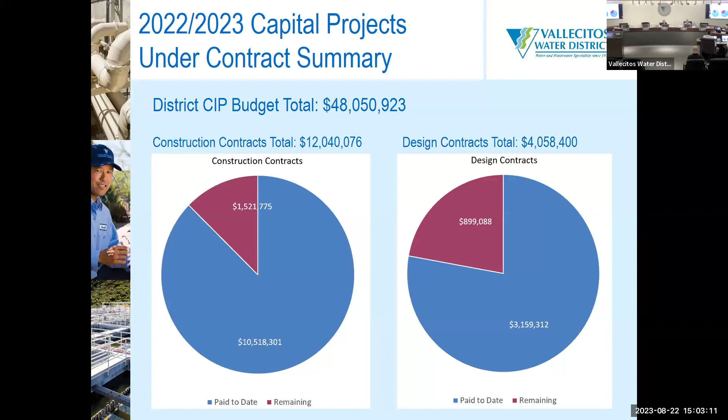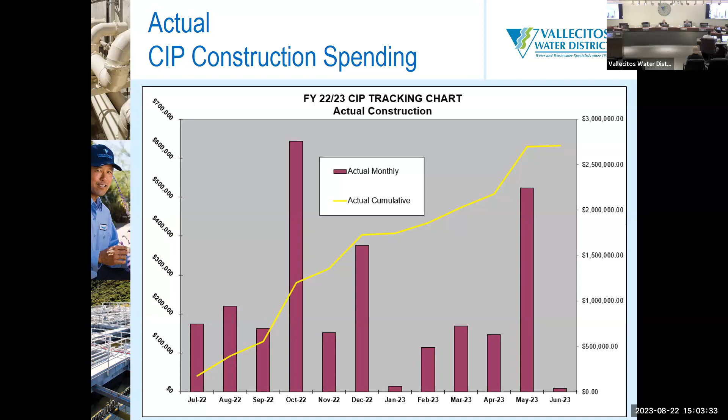Of that CIP construction spending, the actual dollars spent over the year fluctuated throughout the year in different months, as you see by the bar graph. But for the cumulative total, we spent roughly $2.7 million of actual construction dollars over the year.

The completed projects realized in 22-23 were 4 projects, including the retaining wall at Meadowlark that is providing space for the Tesla battery pack, MRF tertiary structural rehab and repairs, which was a coating and lining job at Meadowlark, Sage Canyon tank refurbishment, a full exterior and interior refurbishment of the steel tank at Sage Canyon, and the 2021 sewer lining and rehab program. In total, the contracts were just over $3 million.

Looking at the change order percentages, which we always track for all of our projects, on average between the 4 projects we realized a negative 12.7% change order, which is a bit skewed because on the Meadowlark tertiary structural rehab and repairs project, we ended up removing a large part of that scope, which resulted in a credit to us.

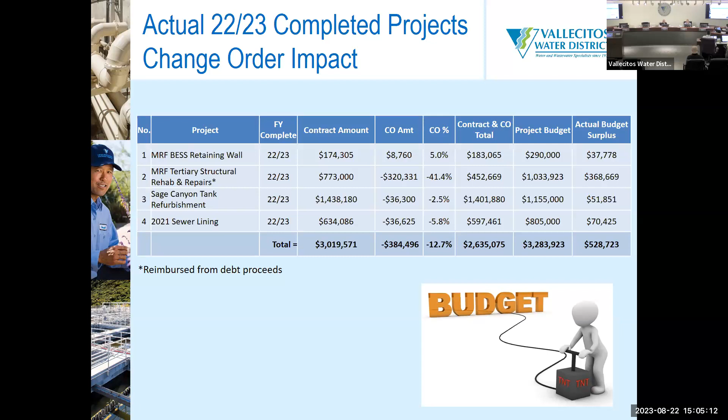Typically we average between 2 to 5% change order values on any given CIP, and that's about what we saw here, notwithstanding the tertiary structural rehab and repair. That value skewed us off a little bit. Looking at a longer 10-year horizon, we tally up the averages of change orders over that period.

Over a 10-year period, we executed 176 change orders on all of our CIP projects, averaging out in total to $826,000 in change orders, which equates to 1.7% of contract value over that 10-year period of time.

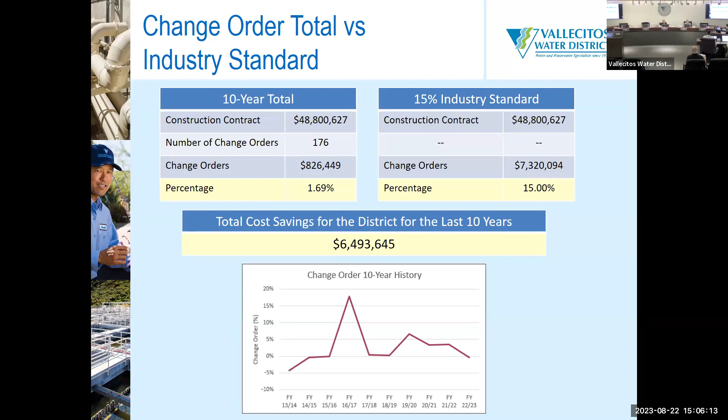If you do a direct correlation with an assumed industry standard change order average on CIP projects at other agencies, roughly 15%, that would escalate the change order value to over $7 million on that same construction contract value. So in total, taking the delta between the two, we've saved the district roughly $6.5 million over 10 years under these assumptions.

For design engineering, we opened 4 new contracts awarded in 22-23: the meters testing and maintenance building, Coronado Hills tank interior and exterior refurbishment, which got combined with Richland 1 tank exterior refurbishment for just over $10,000 total, and the Rock Springs valve replacement for just over $16,000 total. New contracts totaled $213,000.

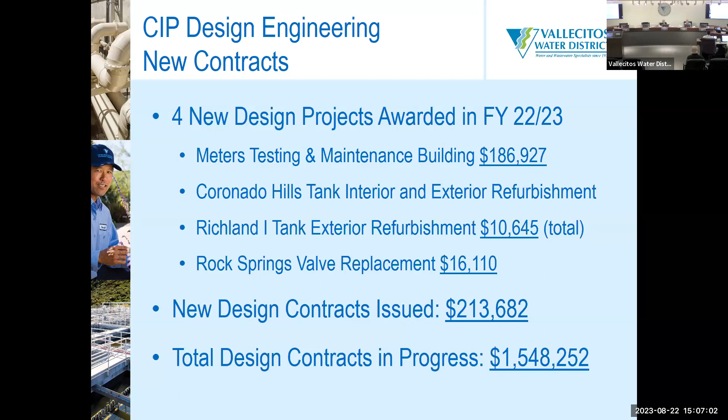Total design contracts in progress, carried over from prior years, were still doing over $1.5 million. So while it looks like it was kind of a slow year in design, we had a lot of carryover projects which kept us busy.

The active CIP projects, including those carryovers, are listed in this table: Tres Amigos replacement phase 1, the Meadowlark conversion to sodium hypochlorite, the chlorine contact tank expansion project at Meadowlark, Las Posas 10-inch water main replacement, Rock Springs valve, Wulff waterline improvements, and meters testing and maintenance building, as I mentioned in the past slide.

We've paid to date roughly $970,000, which equates to about 63% of these total contracts value.

Question: are we doing any of these designs in-house? That's a good question. We had a large role in-house design of the Rock Springs valve replacement, although we did end up getting a consultant on board to help us with design services related to planned production, like drafting services and that type of thing. The staff is really carrying the ball.

As you can see, the contract amount on that is only $16,000, so it's not a huge amount. It's largely just talking about planned production, which we don't really have the capabilities to do here on that scale.

So we are running some other projects in-house. The 2021 sewer lining and rehab was completely performed in-house, and that project was finalized in construction last year. That project isn't on this list because we're just talking about design right here. We also have the Ranchero Sewer project, another smaller one, which we'll carry forward in-house this current fiscal year as well.

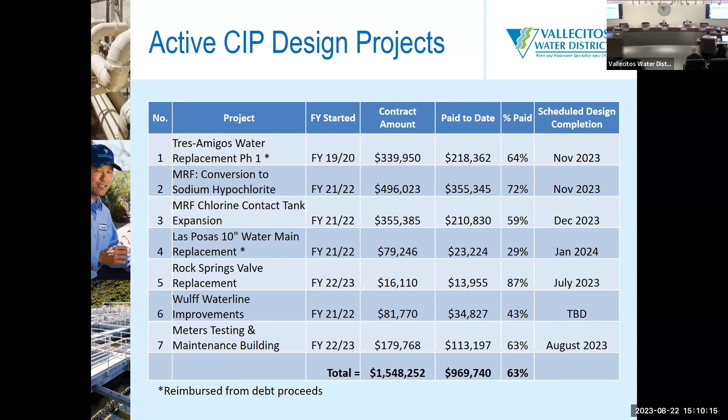And then we go by 2 different phases. If it gets over 150, we're going out for RFP. And if it's significantly larger, whether it's a $250,000 or $350,000 design effort, then we cast the net a little wider. Okay, thanks, good questions.

Just another look at historic spending for CIP, going all the way back to fiscal year 2012-13. I'd like to note that since my time here starting in 2019, we've been ramping up capital facilities and design spending, and this tracks really well with where we're at today in construction awards, getting some large milestone operational priority projects out to construction, which started back in the 2019, 2020, 2021 timeframe.

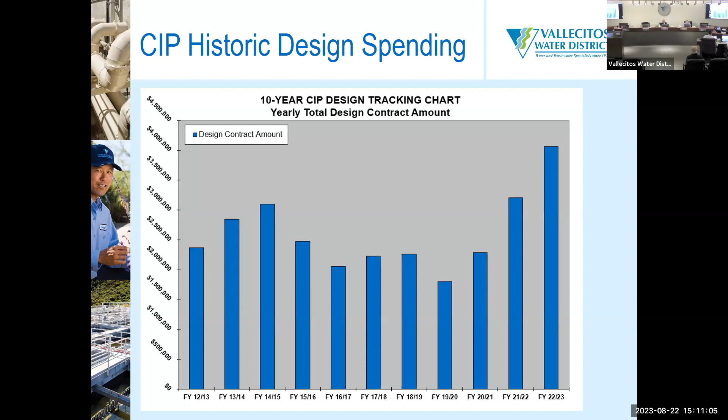Those are actually finally getting realized now in construction. Projects in construction over the last fiscal year 22-23.

As I mentioned, the in-house design 2021 sewer lining and rehab was completed in March. Meadowlark tertiary structural rehab and repairs was just recently completed in June, just before the start of the current fiscal year. Palos Vista motor starters upgrade — I have good news, this one is now breathing new life. We expect to complete this one after a bit of a delay.

We expect to complete this in September, next month. Sage Canyon tank refurbishment was another large priority project, and we experienced some delays during the pandemic, but completed that earlier this fiscal year in February — last fiscal year, I'm sorry. And the Meadowlark retaining wall for the Tesla batteries was completed in March.

And the 16-inch emergency bypass, along with a 12-inch fail-safe pipeline rehab and repairs, a big priority operational project, is currently in progress. We're nearing completion and expect that will be attained in October of this year. All in total, just under $5 million of completed projects in the last fiscal year.

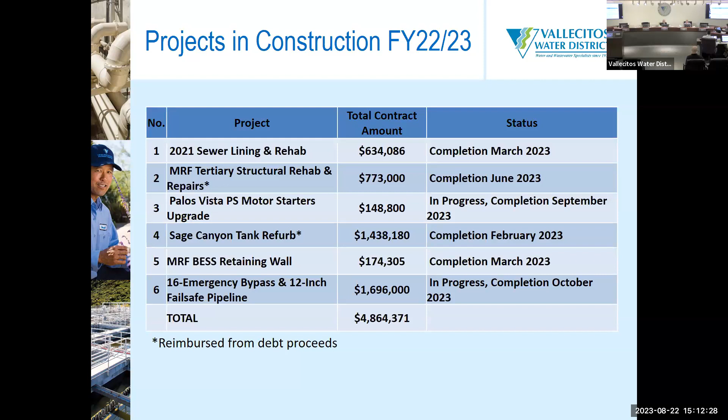And just some historical annual budget versus actual CIP spending, and how we utilize those funds each year. In the last fiscal year 22-23, I had a total CIP capital facilities budget of nearly $30 million. We realized actual spending of $19.5 million, which equated to about 66% utilization of that budget. And in that 5-year average leading up to last fiscal year, including last fiscal year, we averaged about just under $25 million.

$24.3 million in annual budget, and we realized spending of, on average, about $14 million, about 58% utilization. So last year, we actually increased our average utilization by about 8%. So something that's noteworthy there.

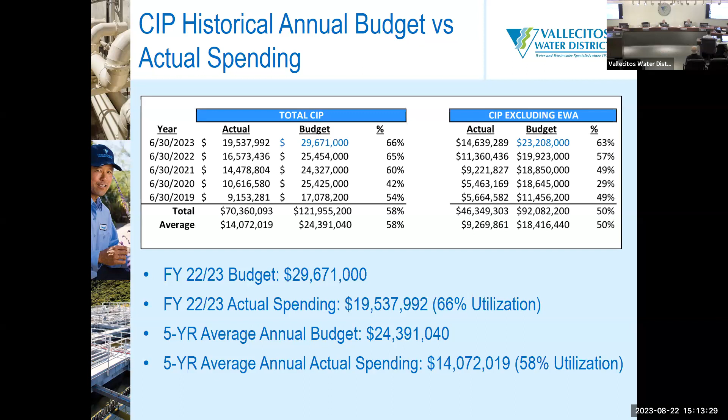Recapping some completed projects. Sage Canyon tank: in the upper left is a before picture of the exterior, and on the bottom left is an after picture of the refurbished tank. Inside, you can see the steel rafters on the roof, which underwent repair or replacement, and the nice new coating on the interior. This is a 3.7 million gallon steel reservoir, completed in February.

Question: has anyone ever thought of painting the tanks in camouflage colors so they blend in with the background? We have a district standard green color you see before you. I'd defer that to AGM Gumpel.

We do have options on colors. A lot of agencies go out to the local community service group, like the county, city, or HOA, and ask them for the colors, but when you open it up, sometimes they make the wrong choice. The benefit of a standard color is that over time it doesn't change, and whenever there's graffiti, it's easy for us to match that standard color. Even though it oxidizes and changes in tone, it's still a better match than a custom color. We stock the standard color to help with that, since our tanks do get graffitied or tagged, so it makes it a lot easier for us to house and stock one color.

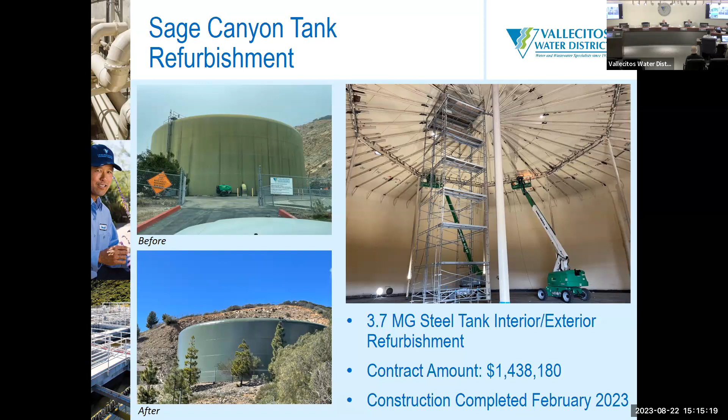The next project of significance: we completed final design last fiscal year on the Meadowlark Failsafe Buena Reach project. Directors just took action at the last board meeting to award construction, and this project is moving into construction. We are currently getting under contract and expect a start next month in September, with completion around March 2024. As a reminder, the ductile iron pipe of the existing failsafe is corroded and at risk of breakage based on history of breaks. The picture shows a piece of the removed ductile iron pipe from 2018.

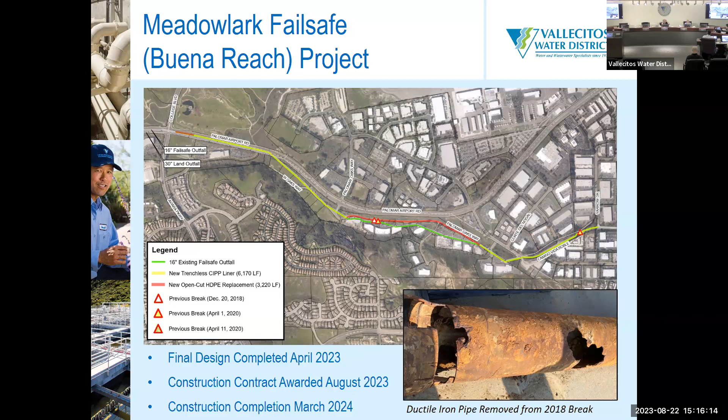Is that fused? It is. It's going to be a jointless, fused joint pipe, and won't be subject to the same corrosion that ductile iron encounters in this corrosive environment.

Another big milestone project is the Montiel Lift Station Force Main Replacement Project. Directors also took action on this at the last meeting. We completed final design in fiscal year 22-23, and we look forward to completing construction of the Force Main and Gravity Improvements Project this current fiscal year.

The photos show the Nordahl Shopping Center on the top right, and on the bottom right is the existing Montiel lift station as it is today, with the existing easement shown on the bottom left, visible from SR 78, between the Caltrans right-of-way and the Costco there. You can see it from the freeway. We expect work on this to start early in September on the Force Main improvements, beginning in the Nordahl Shopping Center and working towards the lift station.

Is that picture on the manhole? Is that the first gravity portion of the existing, where the Force Main ties in? No, this is on Center Drive, the existing gravity system in the Nordahl Shopping Center. Something further south?

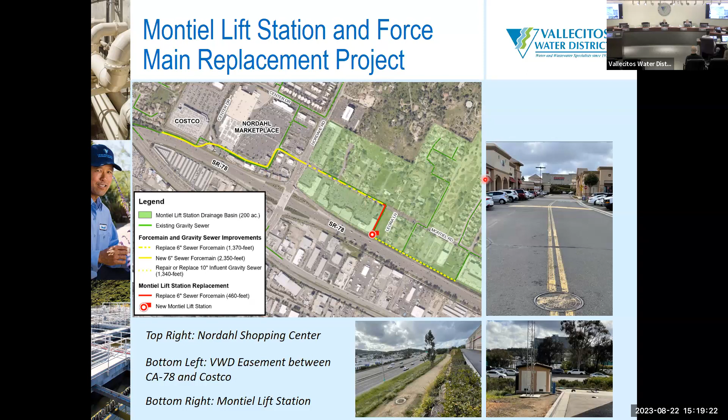Tres Amigos waterline replacement phase 1: a bulk of the design effort was completed in the last fiscal year. We've been in a period of acquiring new permanent easement acquisitions so that we can realign the existing pipeline away from Bonsall Farms. It's actually a better alignment for the district and operations to access the line in the future.

This project, we can expect to go out to construction basically at the start of 2024. We're going to wrap up final design the rest of this year, and then go out this current fiscal year into construction.

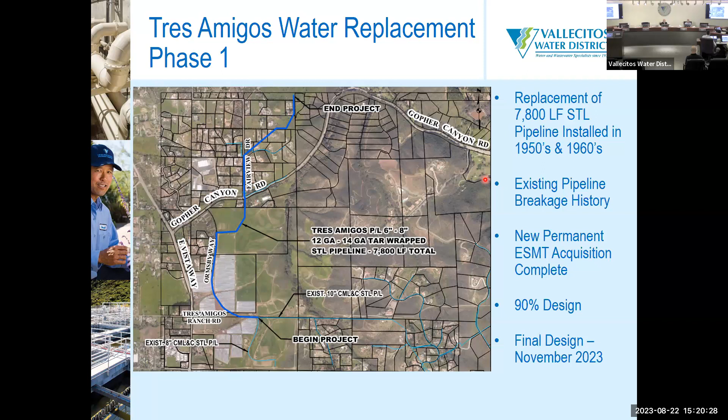Another priority project is the Meadowlark chlorine contact tank expansion. This is a grant funded project, and the existing chlorine contact tanks at Meadowlark really provide a bottleneck on the plant's ability to go from 5 MGD to 6.5 MGD. This project will allow that increased capacity to occur.

We're currently moving into 90% design and working with a design consultant to work through some comments at the 60% level. We expect final design at the end of this calendar year. Moving into 2024, we'll be going out to bid.

Is the plant permitted at 6.5, or is that something that needs to happen? No, that's something we're going to have to do. We're going to have to open the permit, and there are some pitfalls with opening the permit with the regional board. We'll also have to look at doing a new chlorine modal contact time study to make sure it can handle the 6.5.

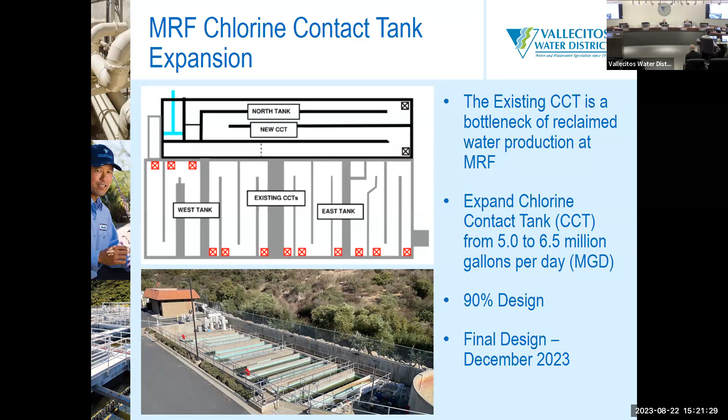And the last project of significance in construction is the 16-inch emergency bypass, where we're also rehabilitating the 12-inch fail-safe, which is just parallel to it, shown by the orange and green line work on the exhibit. This is rehabilitation of roughly 4,500 feet of the emergency bypass sewer and about 3,500 feet of the 12-inch fail-safe. Both of these pipelines are critical infrastructure assets to the district, and both upstream and downstream connections have been made to date, which are two really big events of significance for this project.

So we're nearing completion, probably in the October timeframe. All we have left to do is some CIPP relining on this job.

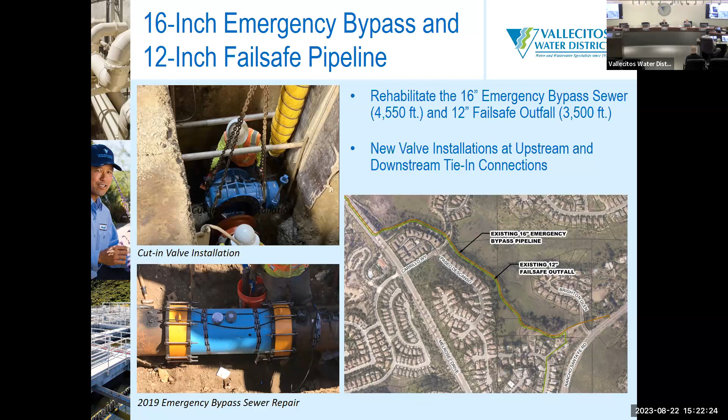And then lastly, the big one, the land outfall parallel sewer section A. We have advertised and selected a land outfall program manager, project manager, who is going to take this project into the planning and design phase. It's going to be a multi-year program. Very excited to get this one off the ground after many, many years of delay.

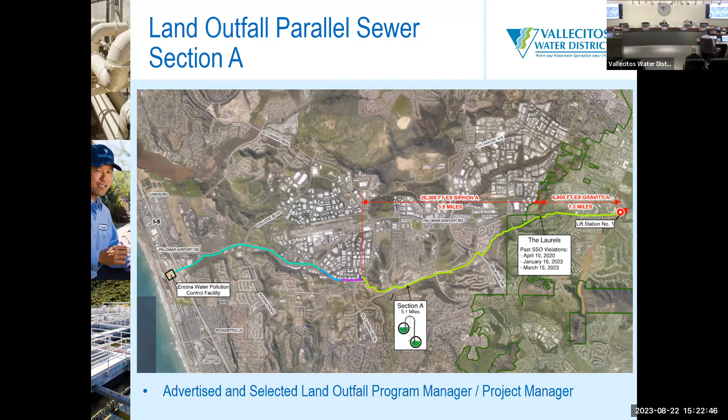So that is really the recap of capital facilities, fiscal year 22-23, and I can take any questions directors may have at this time.

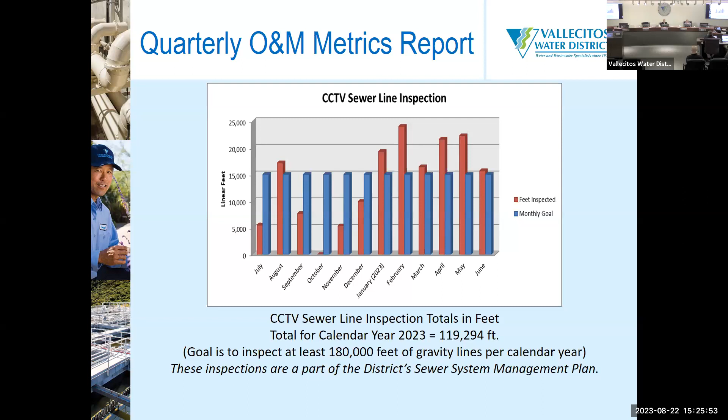It's part of our district's sewer system management plan, which we are updating for the new WDR waste discharge requirements. That's May of '25, so I'll be retired, but we're working on that already so that it's ready to go by then.

We're looking for illegal connections, and we're looking for broken sewer laterals. A lot of times all that we find is they have a cracked or missing cap for their clean out, and as a courtesy we will go ahead and provide them one. A lot of times the guys just put it on right there, then and there, for the customers.

If there's anything beyond that, they bring it to me and we discuss ways of reaching out to that customer, letting them know, hey, this is an illegal connection. We try to work with them on giving them a timeline to have it repaired. The whole purpose for this is when we have storms like we just had on Sunday, we do get I&I—inflow and infiltration. The inflow would be caused by an illegal connection where maybe they've got their storm drain system off their house going right into the sewer like it shouldn't be. So we try to repair that.

Besides smoke testing to try to find areas of I&I, we actually have sewer flow meters populated throughout the district that we monitor. They'll set off alerts for us. We only had a couple go off on Sunday—one was a sensor, it wasn't actually a real thing, which was good because we were afraid we might be spilling. The other one was on the outfall project that Ryan just mentioned. We're excited to finally see that move forward.

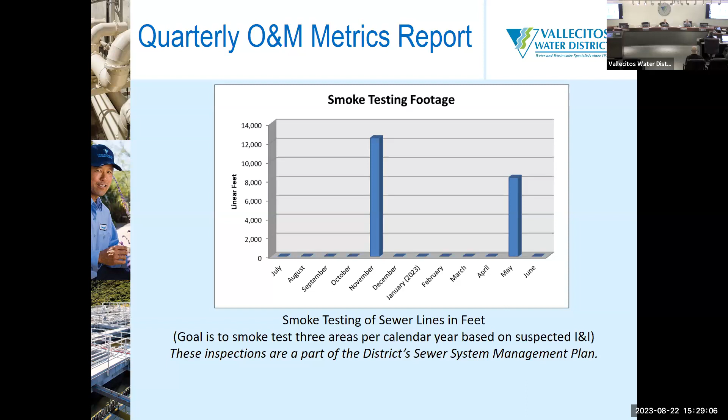A lot of it was the result of the San Marcos Interceptor project, the multiple sewer I&I projects, and continued maintenance of the project. So we are actually seeing results, and those results of that investment the board approves are actually saving our ratepayers money. Unfortunately, EWA's costs went up, but our costs went up less. It's been a great collaboration over the last probably at least 15 years working with engineering and solving these trouble areas, and actually moving some of our lines that were right in the creek.

We've moved them out, and there's still more work to be done, but it's an ongoing process. I've got a question. How often do you see problems in the house laterals between the property line and the main? Is that a pretty rare occurrence?

We don't see their lines cracked very often. Most of the problems we go out and assist with - we don't typically do the work for them - is that they have root intrusion, or they'll have an offset. Sometimes you get a plumber trying to sell them a whole new lateral when all they really needed was a quick cleaning. The customer is responsible out to the main, all the way to our connection. So we always try to give them good advice and help them find what's going on. And sometimes if it's something out in the street, we'll assist them as much as we can. Thanks. Sewer line cleaning.

The board has done a great job allowing us to maintain our 3 jet rodders - two of them are combination trucks with vacuums on them, and one is a different vehicle, a jet rodder only, so it's a little bit smaller. It doesn't have the big vacuum tank on it, and especially with the way they're designing streets and roundabouts in the smaller communities, that's proven to be a great purchase for the district. It can get in and out without running over the curbs. Honestly, we decided to go that route because we're doing a really good job keeping these lines clean, and there's less debris we have to vacuum out.

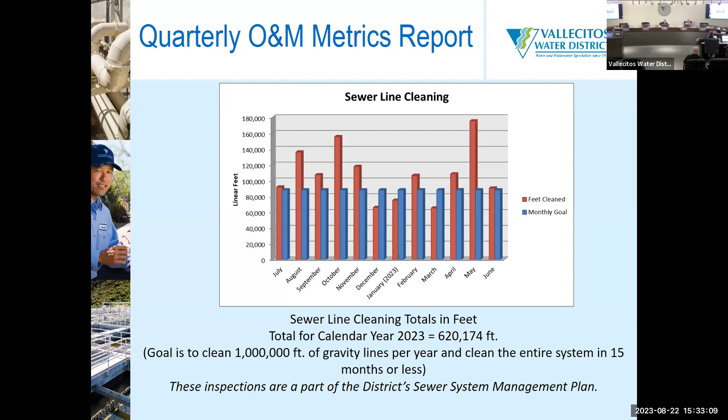And I know you've been down there and seen the work that's been done, both the engineering of the odor scrubbers and how hard the operators down there work to combat any odors. You have a fellow board member that lives right there and he says he's never had a complaint. So having a wastewater plant with homes right up to the gate and not getting complaints is amazing.

In the collection system, we have been working hard. Our lift stations have odor scrubbers, obviously. Director Hernandez will remember that LS1 right on San Marcos Boulevard - for many years the wet well was wide open, not enclosed, and Director Martin used to complain about it. We'd get complaints from there. We sealed that up, put an odor scrubber there, and we've not received a complaint since. So there's been a lot of work over the years on the engineering side helping us with that.

We are still working on ways to improve. At LS1 we inject a bioxide chemical. Actually each of our lift stations, we have the ability to inject a bioxide chemical, which allows the bacteria to use that instead of the sewage to get what it needs, and it won't release hydrogen sulfide gas that way. But it's a difficult balance - if we inject too much going down to the plant, then we're sending them too many nitrates, so we have to be careful with that. The crews do a great job.

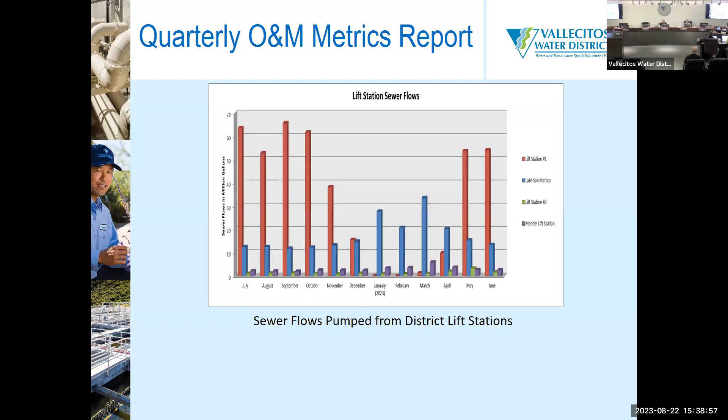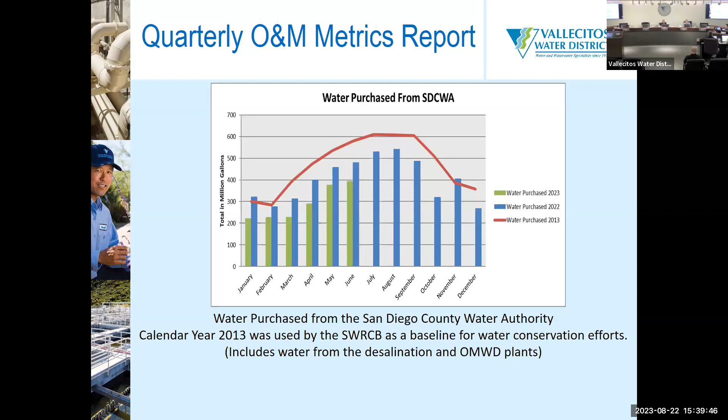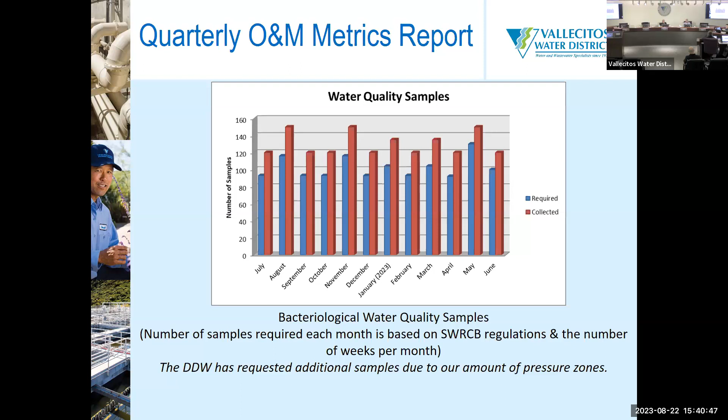Water quality samples - this is one I wanted to address because it always looks like we're taking way more samples than required. I had a discussion with Sean Askin, our water system supervisor, about this. The required amount, shown in blue, is actually what is required per state regulations, based on the number of customers we have and/or the number of service connections, whichever causes us to take more samples is the one you have to follow. But our local Division of Drinking Water engineer has requested additional samples monthly because we have so many different pressure zones, and you're supposed to be representative of every pressure zone - we have over 30, which would mean a lot more samples per week. So that's why you see that there. They're not actually taking an excessive number - we're meeting the state requirements and then the additional requirements that our local division has requested of us.

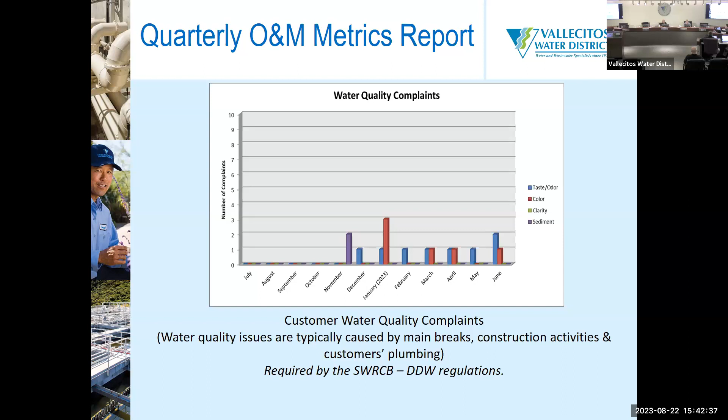Valve turning and maintenance. We started doing valve turning probably close to 20 years ago. We actually got a valve turning truck and a crew. It's made a big difference, not only for having successful shutdowns, but those valves are now being turned on a regular basis, at least once every 2 years. It actually shows us where we have broken valves, so those are critical that we get those in the budget and replace them. And we are accelerating the number of valves per year that we do. I'll get to that on another slide.

This is now actually required by the State Water Resources Control Board for each agency to have a valve turning and maintenance program. It's a pretty high goal, 50%, and we typically achieve it. We've had some problems, the truck was down for a while, and then the valve turning machine itself was down for a while.

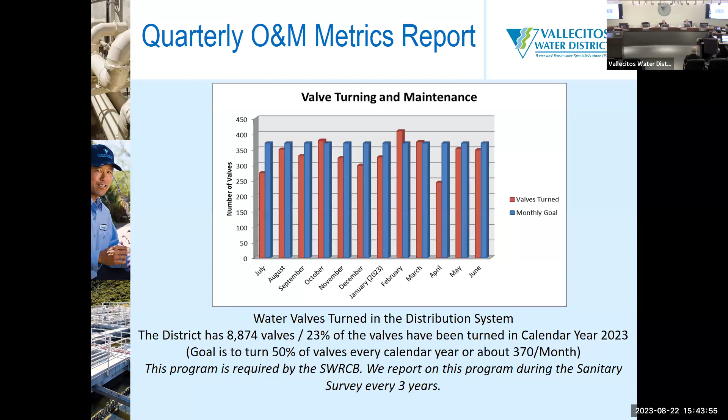I always give the guys grief. I said, back in my day, we turned them by hand. But the valve turning truck itself has the arrow board on it, so it's a lot safer. They're directing traffic around it. We just ran out in the street with a valve key and did it. So they're a lot safer than I used to be.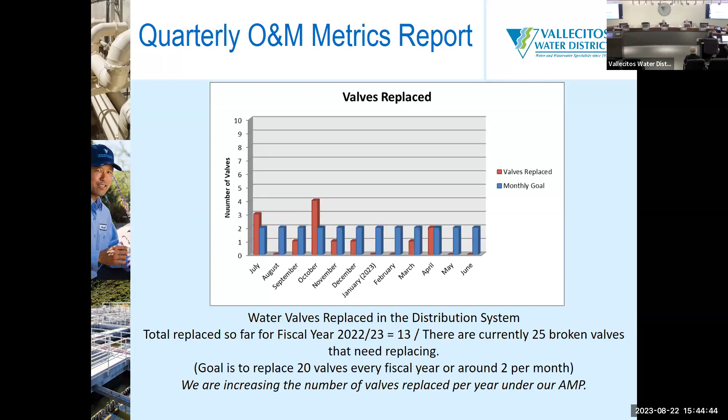Valves replaced. Here's where we're tracking valves replaced per fiscal year. I don't think this slide is actually correct because I know in 22-23 we wound up replacing more than 13, but we are accelerating it now. Instead of 20 valves as of this fiscal year, end of last fiscal year, we are now going to try to do 30. I believe Eric's working with the asset management program to go even beyond that, but that's going to require an annual CIP where we get a construction crew, an outside construction crew. We don't have enough staff to do more than about 30 per year.

Water main breaks. I mean, knock on wood, we obviously track that, and it changes from year to year. It's showing 33 in 2022. The year before that we had only 18. So far in 23, we've had 11. We've had at least one more since this slide was developed, and we're working on another one yesterday, so there's two more.

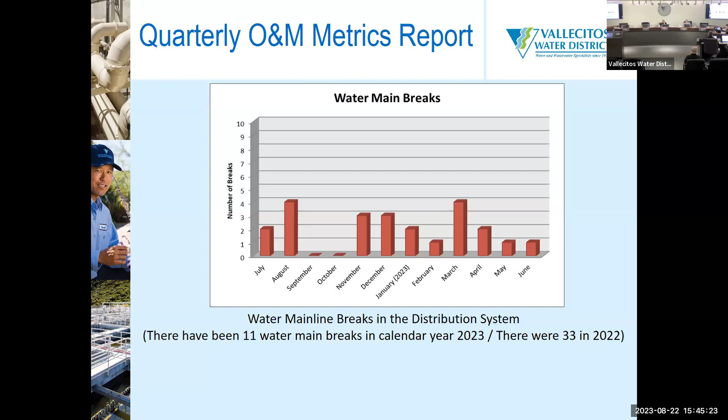I was going to show you the coming up slide for fire hydrant hits. Right before coming in here, we had a fire hydrant hit, and according to Kevin, it appears the lady had a little too much wine in broad daylight, and I think she got the silver bracelets. Wasn't there a lot of fire hydrants hit between 1 a.m.? Yeah, 1 a.m., closing time at the bar is like 2 o'clock.

Water main breaks, it could be called the road reconstruction program, too many of those with the new roads that we build. A lot of that is because of the concrete treated base that the city of San Marcos required for a lot of these developments. The water pressure hits that, and then it sheets right underneath the asphalt and rips up everything. You might have just a small localized area that got excavated, but it shoots all that sand out and ripples the road. Apple Wild and Echo Lane were two that were $100,000 apiece to repair because it just destroyed tons of road. That's the biggest part of the cost. Not a lot of fun to have to pay those bills.

Sanitary sewer overflows will no longer be allowed to be called SSOs. The state, with all the different things they're doing with their updated WDR, everything's a sewer spill now, so it won't be an SSO. In the last 12 months, we've only had two, and both of those were due to atmospheric rivers, the one in January and the one in March.

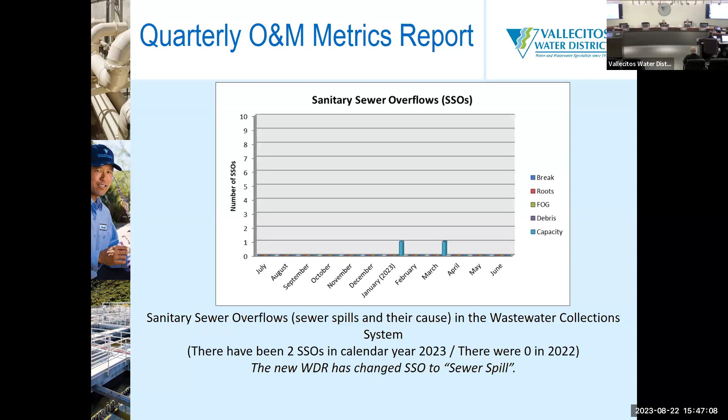Service line leaks, kind of hit or miss. Some are caused by contractors hitting them. A lot of them are caused by just having really corrosive soil, so the copper lines in those areas, when they do fail, we'll go pull a whole new service line from the main to the customer's meter, and we drop an anode, so it lasts a whole lot longer. But copper is certainly far better than the poly lines that were installed.

We had so many leaks on that, a couple of different manufacturers, Yardley and Orangeburg. There were class action lawsuits against those companies. When I started here in 1989, we had over 10,000 service lines that we had to replace. We finished replacing them about 4 years ago. That's about half of our roughly 22,000 service connections, and that was all done in-house construction, not contractors that were hired. Our construction crew did all of that.

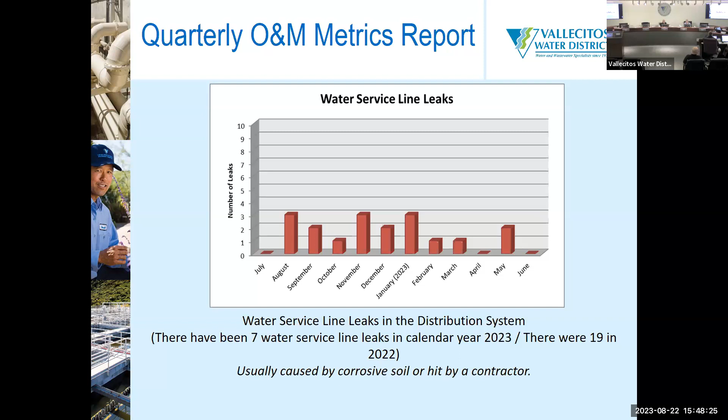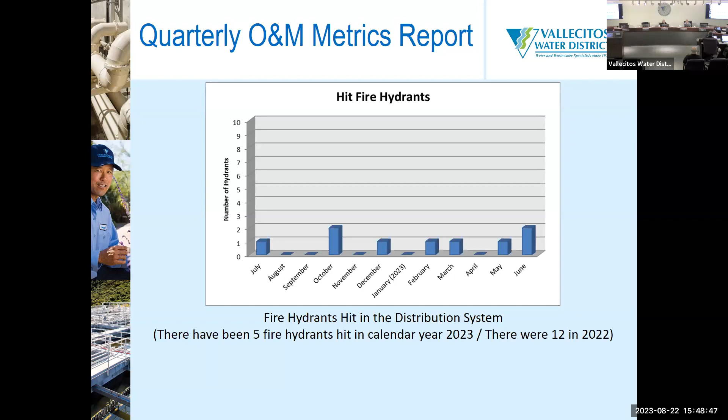Fortunately, we've traded the workload of replacing service lines, but now we're tracking leaks. So, fire hydrant hits - we already kind of talked about this. It's interesting, most of them are at night, and several have been due to imbibing alcohol or something else they shouldn't be doing. Just for your information on that.

San Elijo Pump Station, OMWD water purchase. You'll see we were not hitting our target at all for many months - it was about a 12-month period, or I guess 11 months. It was mentioned in previous slides, the Sage Canyon tank refurbishment - we could not take water from that pump station during that time, or we would blow up our system. There just wasn't enough ways to control it, since we had to run everything backwards.

What we're seeing now, where we're not quite meeting our target, is Olivenhain really having some trouble with their plant - I think it might still be down right now. I know it went down a few weeks ago. Their first problems back in April and May were that they weren't able to handle the source water coming in from the water authority. Can't remember if it was too much algae in it - I think that's what it was, since they're a submerged membrane treatment plant. But they didn't really share too many details on what's going on. I think they're having to do a refurbishment right now, so they've been offline.

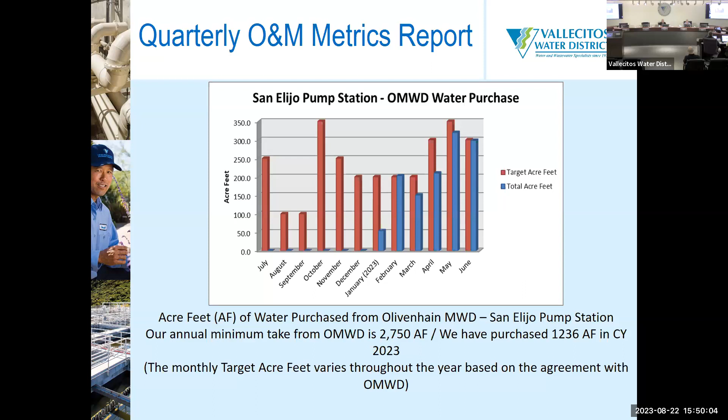The desalination plant - we added the green part of this chart probably 6 or 7 months ago. Glenn asked me to add that in there. That's the delta for the settlement we had with the San Diego County Water Authority. Obviously during the winter we can't take a lot of water from the desal plant, but during summertime, when it's nice and hot, they really crank that up and we're able to get some of that delta. So I don't see any reason why we won't reach that 4,600 acre feet by 2031 - I think it'll be long before then.

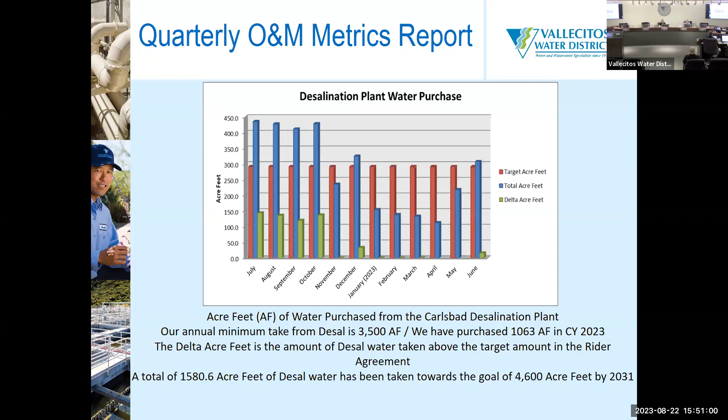So the customers like that water. The water operations guys really like that water - it's the freshest you're going to get, and it's good water quality. Everybody that gets it, when a plant goes down, they notice it. They definitely do. But that's so pricey. Yeah, it's a bit expensive. I think that's the last one.

This is the last slide of the metrics report. The wastewater flow summary report is actually one that Director Elitharp requested probably a year or so ago. I know it's a lot of extra work, but it's just data - we have all the data, it's just a matter of gathering it together and putting it into this form. It shows you the wastewater flows going to Meadowlark and to Encina, and if we're pumping it all to Encina on the failsafe line, or out to the ocean on our failsafe line - that's in there as well. We prefer not to use that line; it means we're treating more than our customers can use.

As you remember, that line has detonated on us a couple of times and been pretty disastrous, with failures. In fact, the slides in the slide deck today and the other night showing that ductile iron pipe - those were the failures we had on that line.

The sewer bypass line - what material is that? Is that the techite? The 16-inch bypass - yeah, it's some ductile, but primarily techite, which we will be lining now. Well, that's a structural liner, right? Yeah, but it's techite. Yeah, that's another pipe of which we do not speak. Yeah, we've had, I think, 3 breaks on that line as well. So we're not using it, but still it doesn't matter.

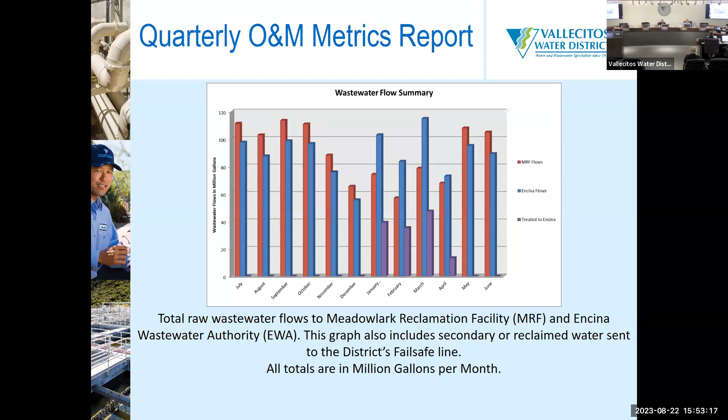Just a quick update on where we're at with the HeloPod, originally called the heli hydrant project. We went with a different manufacturer, which is actually saving us and our partners about $100,000.

We also needed to remove the barbed wire and razor ribbon along the fence line, because the snorkel on the firefighting helicopter could get caught on it, and we don't want a chopper crashing. So all of that got removed.

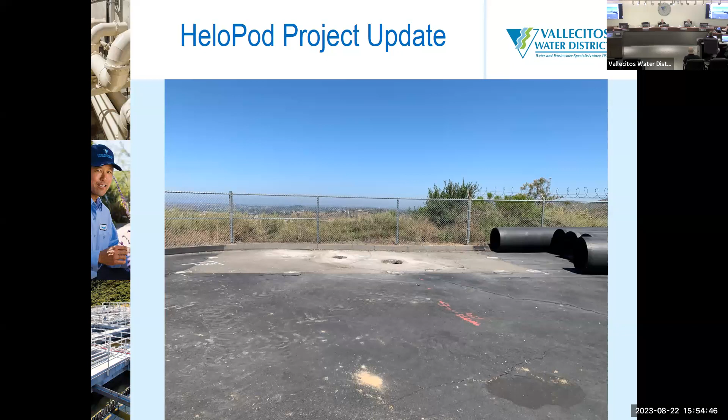The construction crew removed all of the appurtenances that were in there, and we'll do some filling and paving before we're done.

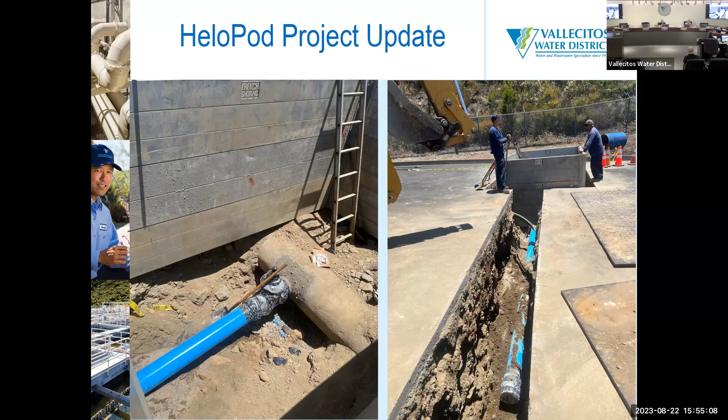This was the connection to the 24-inch CMLC main going into Palomar tank, with an 8-inch PVC line and an isolation valve at the connection point. We had to bring in a welder to get this put in. They ran the line over and stubbed it up so this will be the connection point, where the concrete pad was getting ready to be poured.

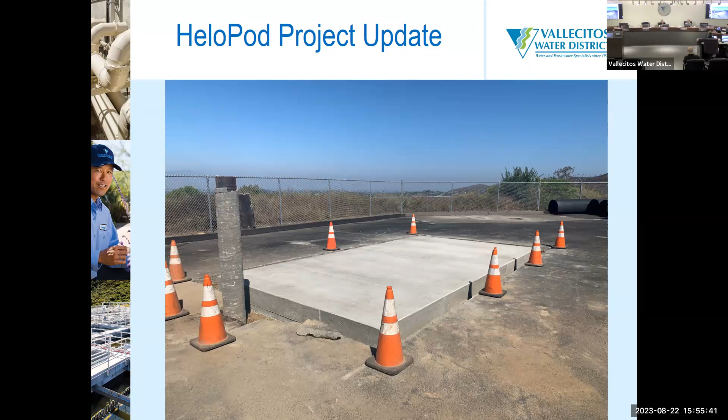This is the concrete pad. We had a company come out and do this because we had to make sure it could handle the weight load. The empty container is around 5,000-6,000 pounds, but when it's full it's just under 50,000 pounds with all the water in it. So we had to make sure that was designed, and engineering helped us get the correct design for the concrete pad to withstand the weight.

So is that air gap? Yes, it has to be air gapped. Yeah, and that's part of the design of the HeloPod.

So Cal Fire's next steps, they'll have to deliver the HeloPod to the site. While Ryan was giving his presentation, Jason Nailing with San Marcos Fire texted me that the HeloPod will be delivered Monday morning. Oh, great, Monday at 9. I've been taking these photos like you're seeing here, and as things progress, eventually I'm sure Chris or probably Alicia will put something together, a slideshow or short movie.

And then how do they use the pod? Going on with what we have to do next, once we anchor it, we're going to connect the water pipes to the tank, and all of that will be controlled through our SCADA system. So the operators, during a Santa Ana, they're going to fill it, but they can fill it and drain it remotely. We'll probably just, when we get into the hot summer months, put water in it and leave it there.

What will happen is the helicopter will drop its snorkel in there. The most any helicopter can draw is 5,000 gallons, and that's a big, huge SDG&E Sky Crane. Most of them are 1,500 to 2,000 gallons. They'll fill the chopper, and it's immediately going to start refilling as soon as they pull the water down. It's kind of like a float valve in your toilet, really, it just sits there. So it's going to automatically operate until we shut off the valve, either on site or remotely.

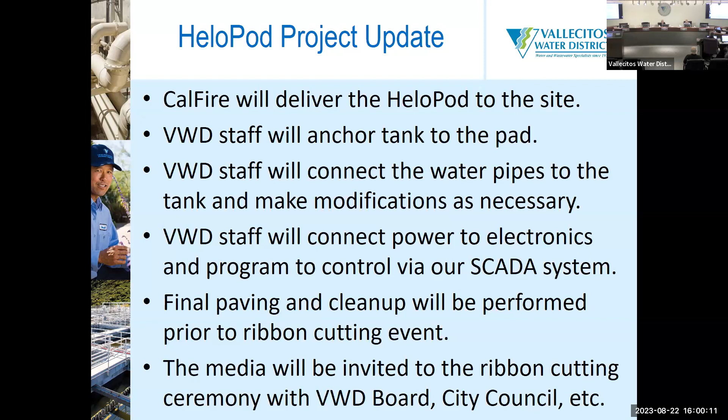Development Services Project Update. So similar to the capital facilities update, twice a year we bring the development service update to the board. With that, I'll hand it over to Jason and Elizabeth to do the development services update. So basically, instead of doing this annually, we do it twice a year. Yep, so the board last saw this a good 6 months ago.

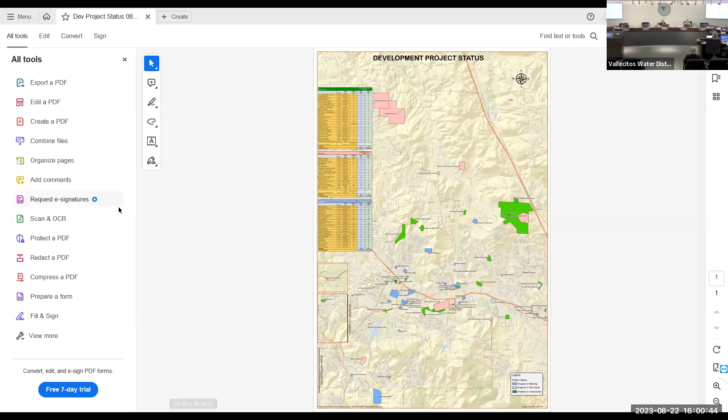Good afternoon, Engineering and Equipment Committee. As James mentioned, I'm here to provide a development update on projects we're working on. We'll go over this revised exhibit, which we've seen before, and then I have a couple of slides to show you on a project currently in construction that you might have seen just driving around town. As a reminder, projects shown in green on the map and in the table are projects in construction. Plans in pink are in plan check, and projects shown in blue are in planning phase.

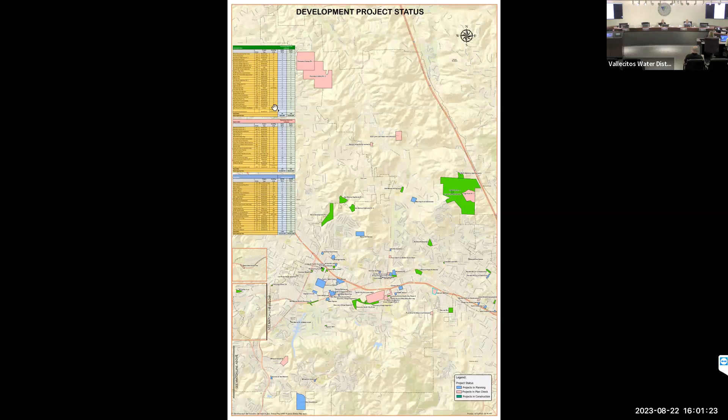Zooming in, taking a closer look at projects in construction, this table shows the project name, type, how many dwelling units, and then the remaining water and sewer cap fees we expect to collect for these projects. In this table, anything shown with 0 for water and sewer EDUs either means the customer already paid their cap fees or we're not serving that project water or sewer.

So for projects in construction, we estimate another about $800,000 in water cap fees that we'll be collecting and about $2 million for sewer cap fees. I anticipate collecting cap fees for these projects in construction in the near future, in the next several months up to maybe the next year or two.

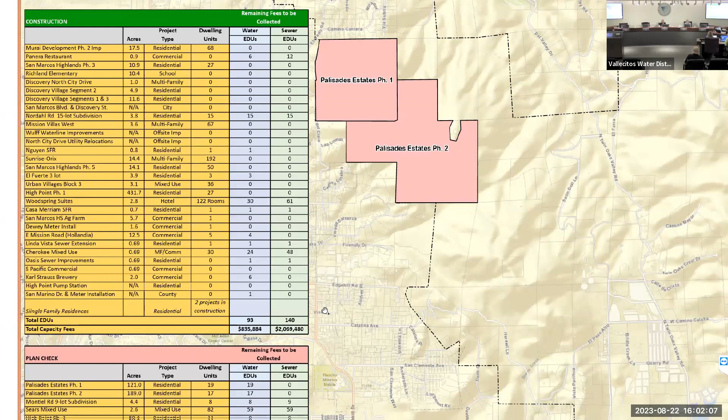Projects in plan check: we have about $3.2 million worth of water cap fees estimated, and $9.3 million in sewer. These projects are going to construction, some of them soon, some of them can take a couple years, so it could take anywhere from 1 to 3 years to collect cap fees for projects currently in plan check.

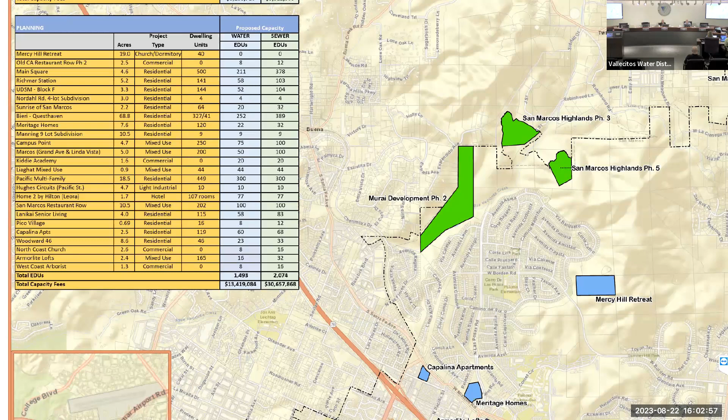Projects in planning don't always move forward to plan check and construction. Sometimes they die out, whether they're not feasible to move forward for various reasons. The projects that do move forward, I would estimate we might collect cap fees in maybe 3 to 5 years. We have estimated $13.4 million in water cap fees and about almost $31 million in sewer cap fees for projects in the planning phase.

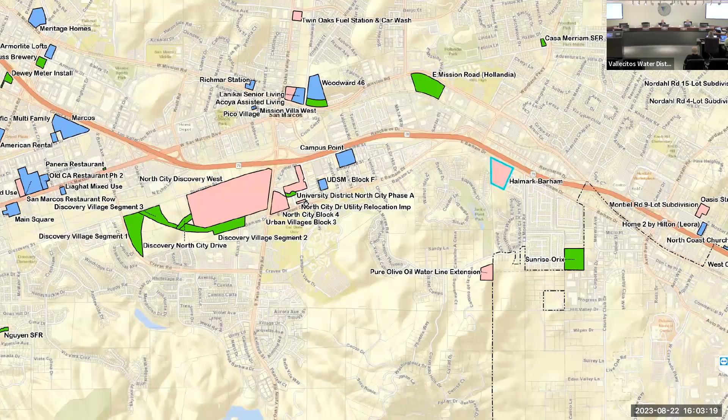Project that we'll highlight after we stop sharing this screen is the University District North City Phase A and North City Drive utility relocations. Kind of an interesting project in construction that we'll go over shortly, unless anybody has questions on any projects shown on our exhibit. Nothing? Okay, photos.

If anybody's been driving around town in the vicinity of the Twin Oaks area, University District, Cal State San Marcos, you may have noticed a couple of cranes that mobilized a couple weeks ago. You can't miss them driving on Highway 78. So just wanted to talk with you and share what this project is. It's kind of interesting to have cranes this size on site in San Marcos.

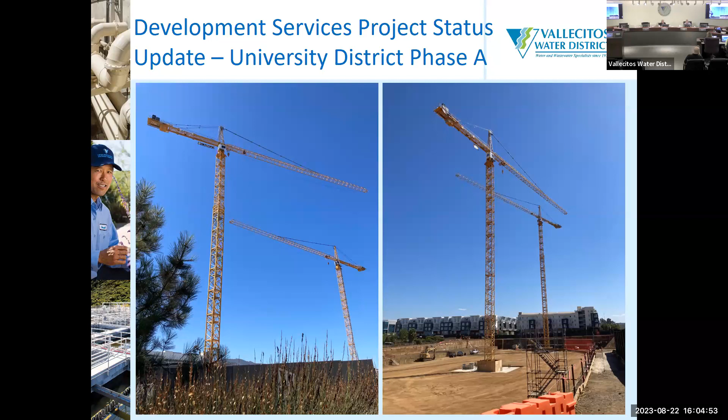What's being constructed is a mixed-use residential project. It's really dense, one of the projects constructed property line to property line. It is 464 residential units with mixed-use commercial on the first couple of floors, and it has a 2-story underground parking structure. You can see in the photo on the right, it's kind of hard to tell at this scale, but excavation for the parking structure is probably about complete. Shoring is installed for excavation of the structure. If you could see trucks or heavy equipment down there, it gives you the scale of the size of this project.

12 stories. This first phase is Phase A. It will be a 12-story building. And to accommodate that...

The area shown here highlighted in blue along North City Drive is this first phase, and everything north of North City Drive and south of this utility corridor is the underground parking structure we just looked at. Access into the structure will come from this roundabout on June Way. So we're having to relocate this existing sewer, and we also have water coming through this corridor. This sewer is being removed, and this sewer in North City Drive is also being removed. The sewer here in North City Drive is actually being relayed to drain west rather than east, with a sewer main extension to Twin Oaks Drive. So we're rerouting sewer to get it out of the way for excavation of this parking garage. We also have water here, so this water's been removed, creating a dead end in this utility corridor. There's a lot of utility relocations being performed by the contractor for this excavation.

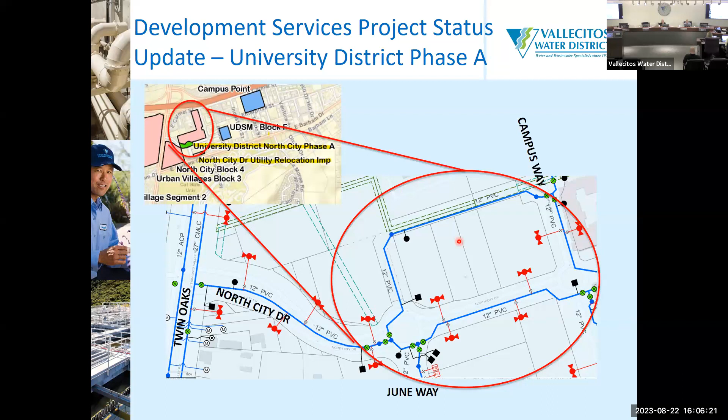It's interesting. When I was president of the chamber in '81, we had a retreat out in Palm Springs, and I said, in the future, we will be a teeming metropolis. I had people snickering in the audience. Well, a 12-story building, I think we've arrived. Yeah, agreed. Okay, any questions? No, very. All right, good. Thank you very much. All right.

Next, the asset management plan project update. As the board's aware, the district has been embarking on a full asset management program. The first step is really developing an asset management plan. We're going through the process. This is going to be an update. There'll be other workshops to present the asset management plan to the whole board, but this will be an update of the actual plan itself, its progress, and what some of the plan entails. With that, I'll hand it over to our asset management supervisor, Eric Bennett, and our district engineer, Jason Hubbard.

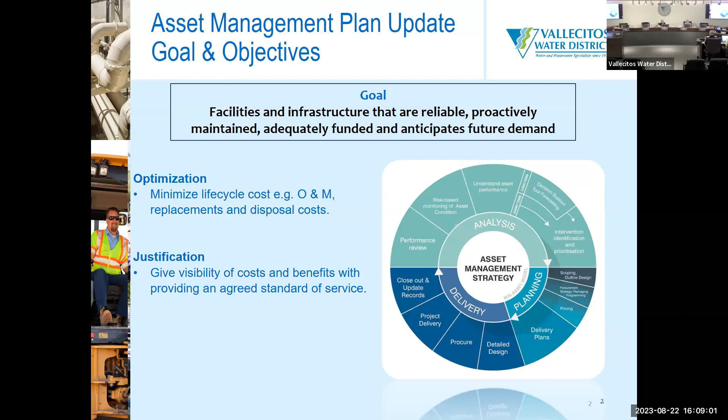Here's another visual representation of the development process for creating an AMP. The district, along with our consultant, Black & Veatch, went through each of these tasks, which involve data requests, multiple workshops with district staff, and many meetings to verify findings and outcomes.

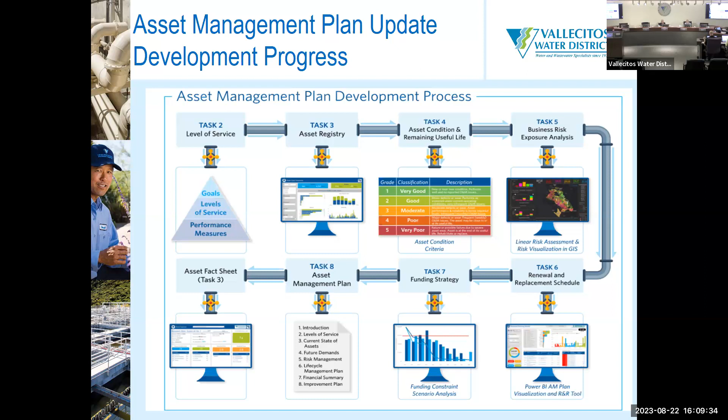So with this brief review of what an asset management plan is and how it's developed, we'll get right into the tasks, beginning with levels of service. Levels of service are the goals set by the district, and once identified, can be monitored for progress and outcome. Defining the levels of service sets the bar for the objectives of the district that we want to achieve, and helps us provide the basis to monitor progress towards achieving them.

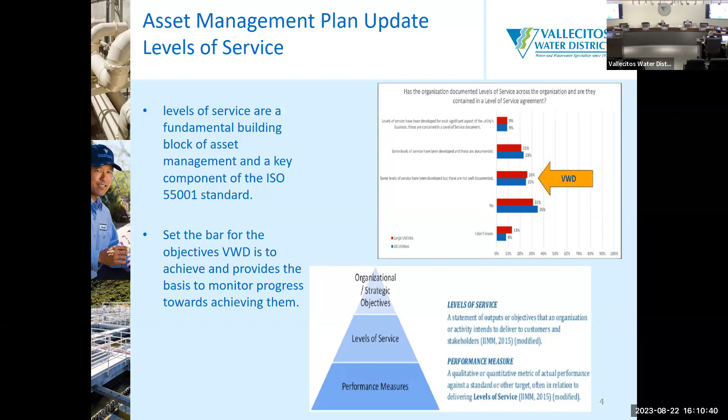Seeing these recommendations gives us the opportunity to take a hard look at our goals and priorities, and to see if we are doing everything we can to meet and accomplish them.

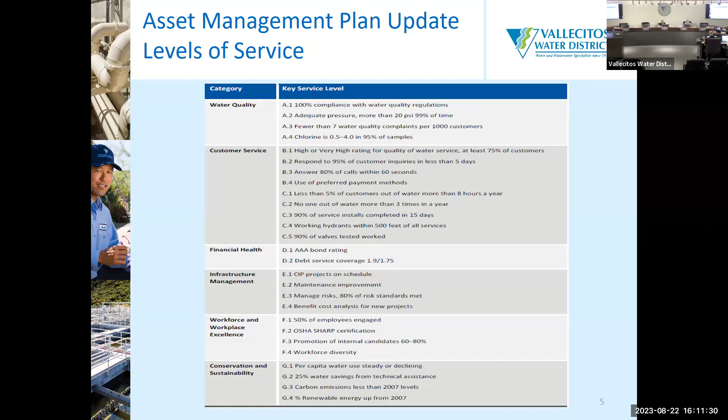Now we'll briefly cover creating an asset registry and categorizing our assets. The purpose of the asset registry is to enable the district to know the status, procurement date, location, price, depreciation, and current value of each asset. Once the registry is developed, the assets were categorized into asset classes.

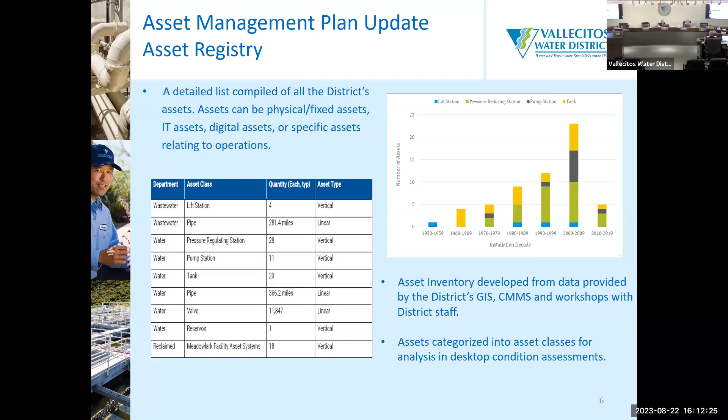Next on the task list is to determine remaining useful life and performing desktop condition assessments. For our assets, the desktop assessments were accomplished by reviewing our past assessment projects, considering practices we've implemented in Maximo, applying industry standards, and through multiple workshops with district staff.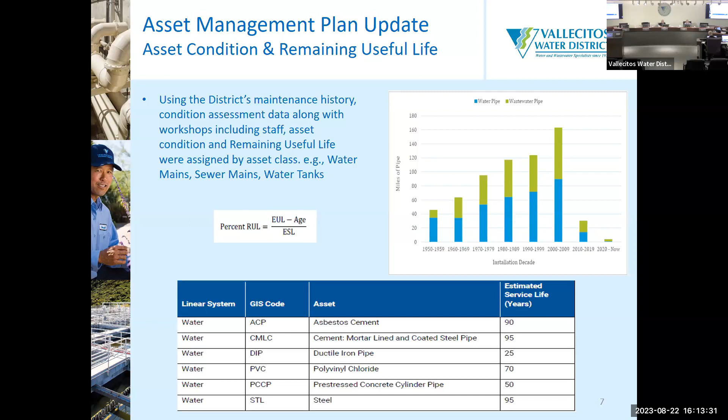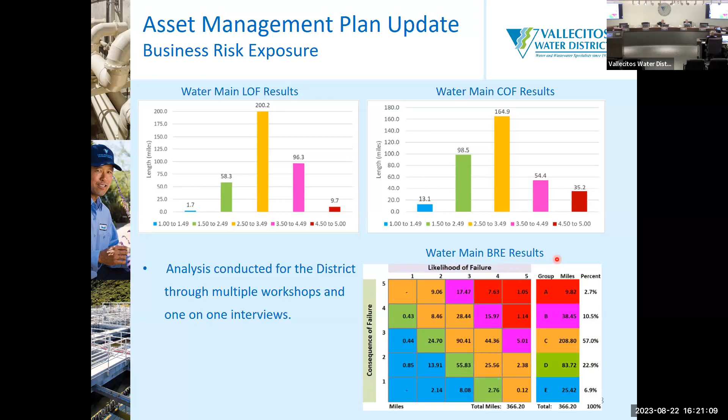So is there an optimum amount to spend or recommendation? Go back to the table. We're actually commenting on this right now. I know we've asked for a couple other scenarios. When we come to the full board, you're probably going to see a graph that's similar, but the numbers will be different. We've also asked for a little different analysis and it hasn't hit the consultant yet.

So the district will end up asking for a combination of clarification of assumptions, especially with the ductile iron pipe, which also may change some of the scenarios. So the bars will be different and the percentages will be different by the time it comes to the full board, but as far as the flavor, this is what you're going to see, just the numbers will be different. So once we have that and Black and Veatch in the room, we can probably answer your question more directly. But until then, right now it's still a work in progress.

But ultimately, we're going to be looking at these different strategies, and similar to what Ed presented in the metrics, we're looking at goals. Can we achieve those goals? Are they realistic? What are the budgeting constraints? What are the staffing constraints, and trying to balance that out? So that's what we're evaluating right now.

There's been kind of a theme for, today's been a longer engineering and equipment committee, but there's been a theme with it because as we go through understanding what our capital outlay needs to be to meet our growth projections, we're also going to start dovetailing in what our asset management renewal and replacement schedule is going to be. That'll trickle down into how we best manage that. At the end of the day, it's going to be a full board decision on what level of service we want to keep and what that looks like as far as costs and different strategies to achieve it.

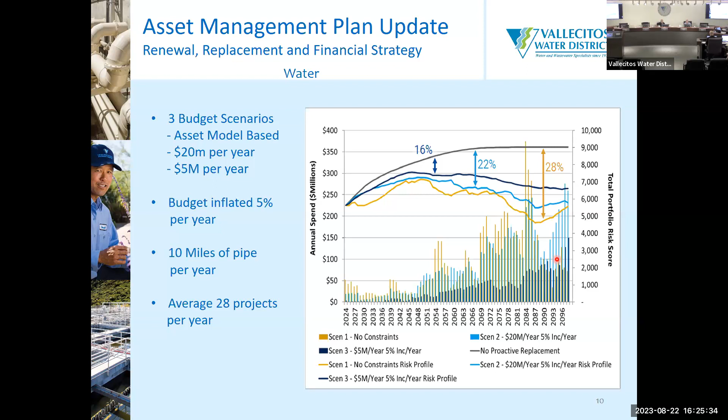So again, as James pointed out, or Assistant General Manager Gumpel pointed out, we did request different scenarios, and these will change when the final version comes in. But like I said, I just want to give you a visual understanding of what we'd be getting on the real plan, or the final plan.

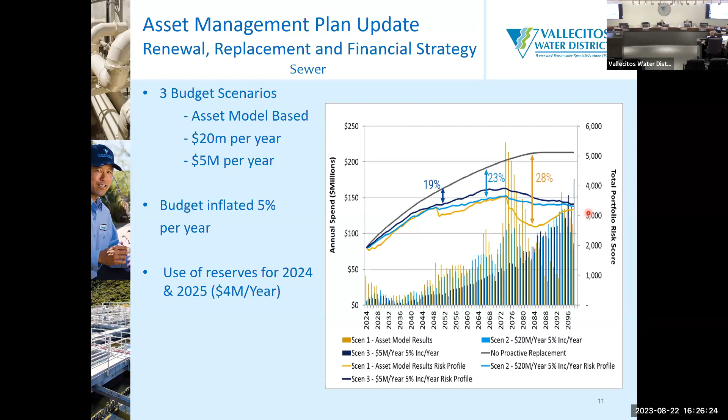So with the draft version of the asset management plan in hand, we're currently in comment phase and reviewing it. We are checking for clarity, their math, general structure and organization of the plan to ensure that it fits our needs and what we wanted to see out of it. Once our comments are sent back to Black and Veatch and the final version is provided, we will prepare a full presentation for the board of directors to ensure that everyone is fully informed.

All right, and now, any questions? No, I think that was excellent. Okay, very good. Next item, water system.

So I'm gonna let you introduce this one, Jason. So this one is basically, I'm gonna turn this one over to the district engineer to start going over, but go ahead, just. Yeah, so this is just kind of dovetailing off of the asset management plan.

Working with Eric, we had an opportunity to work with a vendor to do an independent assessment of the risk priority specifically for our water system. So it's going to do a couple things: it's going to validate some of the things that we're finding in the asset management plan, and also give us a bit of a roadmap for where we should focus our CIPs in the future.

So we will be doing a condition assessment program with Fracta. Fracta is a software as a service company, and they've built an AI, a machine learning program that specializes in water main condition assessments. When the data is input, it produces likelihood of failure scores and can help prioritize pipes for further assessment or replacement, as was said earlier.

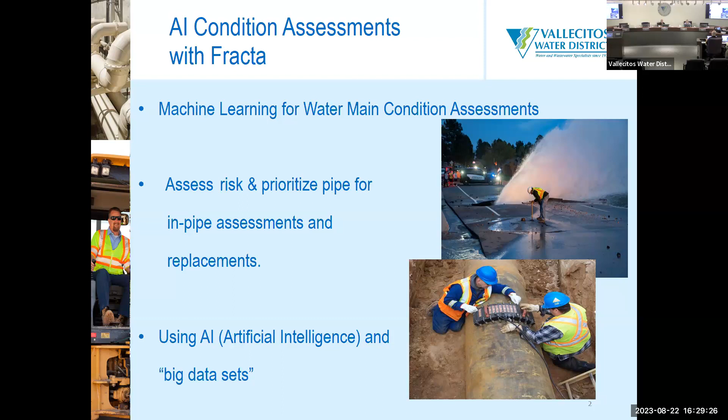And again, the big keyword here is artificial intelligence. Because it's an AI using big data sets, it's gathering information not only from us but from data points from every company that's put into it, using a large set of data points to add to the data we're putting in, which we'll go into in a minute.

Just as a side note, for the asset management plan they're using about 25 data points, correct? And in this analysis they're using much more. I believe the name of the software is Skynet, right? Yes, just double checking. Skynet is the name of the software.

Great, so how does the machine work? Well, before you ask, I gotta say I'm dead set against AI because it's gonna destroy humanity. I don't understand it—the founders of it are even saying that, so why don't we listen to them? Anyway, luckily we're not giving over control of the system, the operators are still operating it. This is purely for analysis purposes only, not harm. Slippery slope—it starts somewhere. Yeah, exactly.

But it is exciting because it is AI and it's the hot topic these days. As mentioned before, it's utilizing data from 125 different utilities that have already participated, equating to over 180,000 miles of pipe and 580,000 specific main breaks. It has all that information and data stored that it can analyze trends from. On top of that, it uses 150 data points instead of the typical 25 you'd see, so it's able to analyze much more than we possibly could.

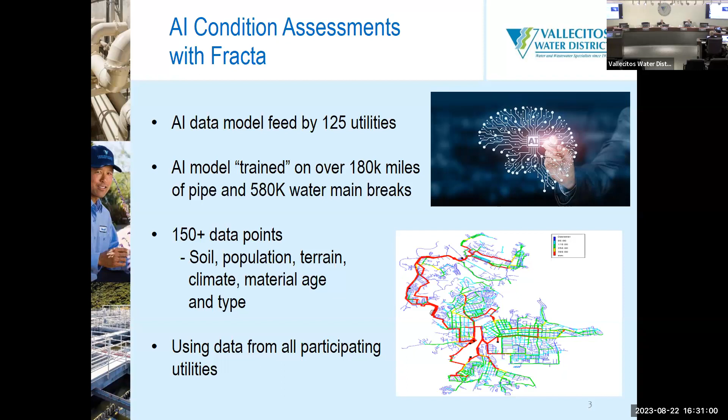So our part is to submit the data request to them—shape files from our GIS systems, past main break information including a GIS main break layer that we maintain, and also a main break Excel sheet, a little old school, but it goes back to 2007. That has quite a bit of information we can provide, along with system pressures, min, max, and static pressures, and parcel data.

Once we provide them with our data, they load it into their model and provide us results within 4 to 8 weeks. One great thing about this is it makes updates easy. If we continue with this over the years, we can give them fresh information—say capital improvements replace a large water main on San Marcos Boulevard, or they're planning on replacing the Tres Amigos line. We can give them the updated plans and data, and it goes into the model and readjusts the likelihood of failure for the system.

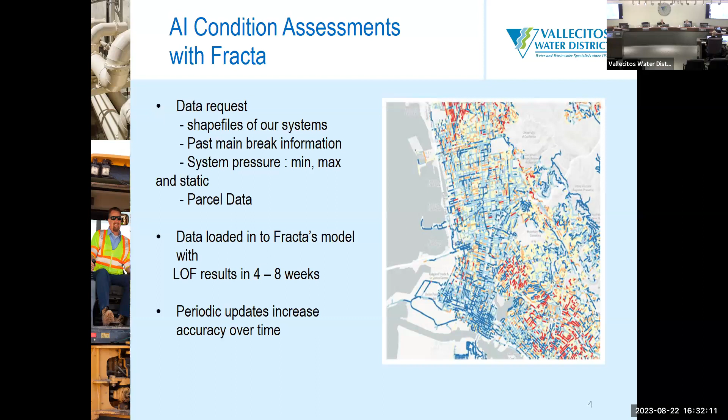So it's pretty neat—so when it takes over, it'll know exactly where to shoot the rig. Yeah, just what we need. Yep.

The goals of the project are to do a district-wide real-time likelihood of failure identification. As we've said, that would be used for future leak assessments or condition assessments throughout the district, to help identify future projects and increase system knowledge—maybe to identify something we never thought was an issue before.

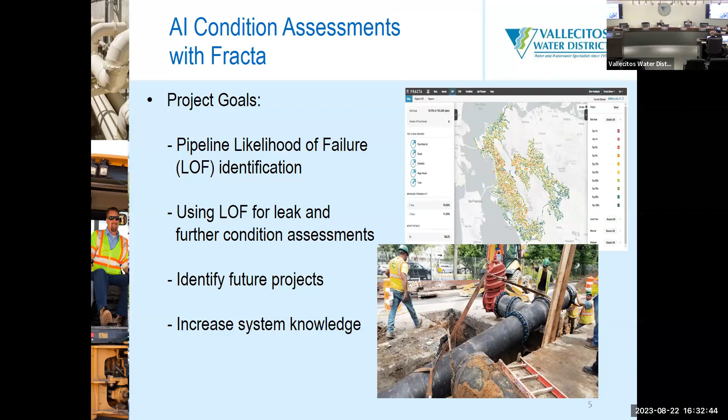All right, so where are we on this one? We had our kickoff meeting already, so we're up and running. We've received the data request and we're processing it, down to the last bit of data, which is the pressure data. It's becoming a little tricky to get, but we're getting it. Once we get that to them, in 4 to 8 weeks we should have access to the system and our data analyzed to see the likelihood of failure and condition assessments of our district in real time.

Does the pressure information come out of the SCADA system? It's coming out of our GIS, so it's just taking a little bit of time to get. They have pressure points for each of our meters in the system, which is quite a bit of data, so it's just taking a bit to organize. Yeah, we have elevation data on GIS, so we could calculate the elevation between points. Yeah, and this is a pilot program, so we're kind of looking at this independently.

There are other utilities that use this through a subscription process, and they can update that data daily, weekly, monthly. Right now, we're just looking at it as a pilot. Maybe this is something we want to invest in every 2 years, every 3 years, every 5 years to analyze the system. So there's options there, but this is a good pilot project.

And I really appreciate Eric and his team. I always like to remind the committee that Eric's asset management department is a team of 3: our CMMS planner, our GIS technician, and Eric. So they've got a lot of workload, and looking at pilot projects is really above and beyond, and a testament to Eric's dedication to the district and the long-term goals with the asset management plan and what we're trying to achieve.

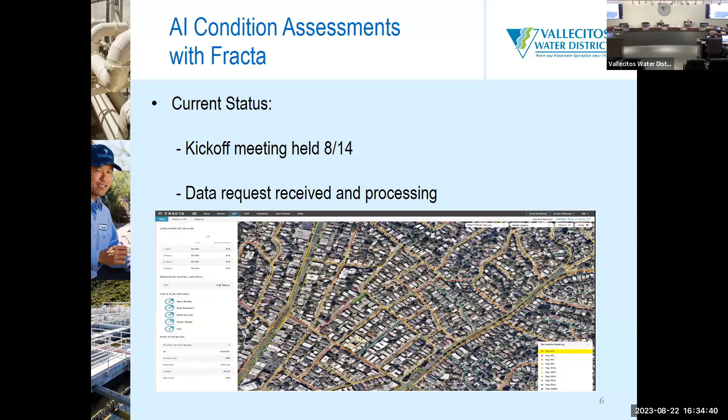Yeah, we're planning on creating a fake contact for the AI and naming it John Connor to see if it still works. But if it doesn't, then we know we've gone too far.

Yeah, very good. I think that was the last item, but I did want to ask Ed. I voted no for that program on the electrification infrastructure program. Right.

If we have to begin worrying about electric vehicles in 2025, do we have vehicles that are going to have to be purchased around that time that will be electrified? It's actually 2024. Beginning in January 2024, we'll be required to purchase 50% of our purchases that meet the fleet requirements, the GVW — gross vehicle weight. They have to be 50% regardless.

Unfortunately, that does not include our pool vehicles like the Explorers, anything lightweight — they don't consider that. I also asked our consultants, and the F-250s are considered 10,000 pounds. Yeah, and it's anything above 8,500.

So I asked, well, what if we don't need an F-250, but we can get away with an F-150? So we replace that F-250 with an F-150 Lightning — does that count towards our 50/50? It does not. He says all you've done is reduce your fleet by one vehicle because it's an F-150, not an F-250. But we don't even have the charging infrastructure right now for that.